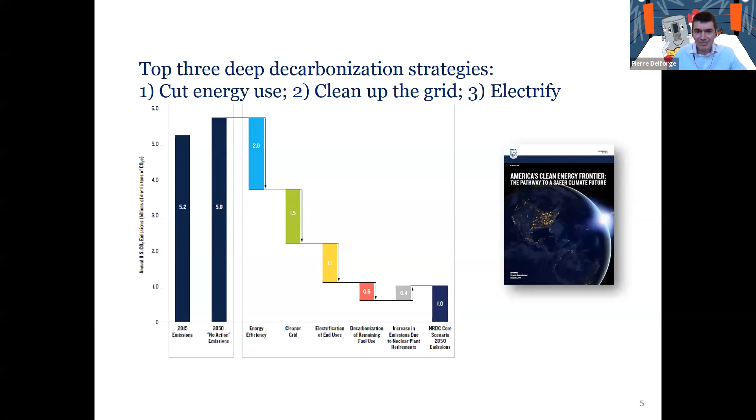So the building sector is responsible for approximately 2 billion tons of CO2 emissions in the US annually. That's out of 6 billion tons, so it's roughly about a third, and that's just from an operating perspective, not even including the embedded energy to build buildings. But just the operating energy use is about 2 billion tons.

Half of that is from thermal energy use, which is basically heating and cooling, water heating, cooking, drying, fireplaces, everything that basically generates heat or cooling. And decarbonizing that, so transitioning from the use of fossil fuel in this sector to high efficiency electric, can cut this energy use down by 1 billion tons, as long as we power it by clean, renewable electricity. So that's a huge number, and it's just the US. It's more when we expand it globally.

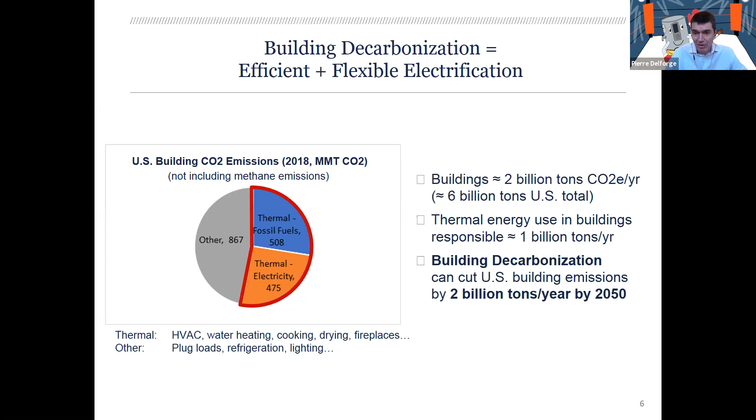And this is the opportunity that we have today of moving away from the use of fossil fuels in buildings to clean electricity powered by high efficiency electric heat pump technology. And I'm going to talk more about this in a minute. And so far, I've talked mostly about carbon, but it's not just about CO2. It's also including methane emissions, CH4.

So the challenge with fossil fuels and with gas in particular is that a significant amount of it doesn't get burned. It escapes from either the well or the processing plant, the distribution pipelines, or even in our buildings, behind the meter from our appliances and pipe within the buildings. And it doesn't take a lot of this methane to leak to have a very significant impact on the climate.

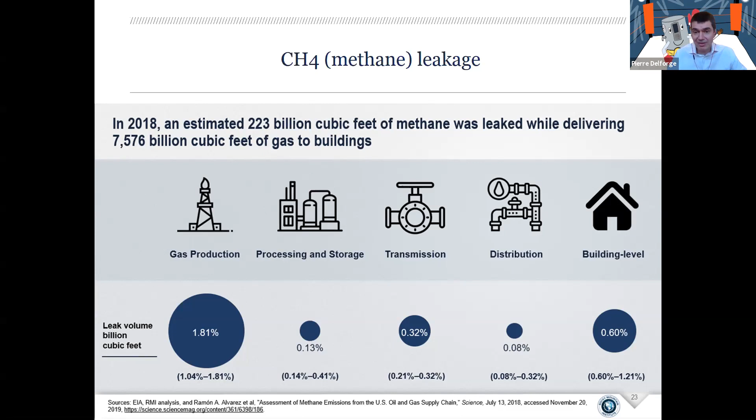So next, please. The best science that we have today is around 2.3% of methane upstream of the meter, so that's from the well to the meter, and about 0.5% behind the meter. Actually, newer science is coming out showing there's even more than that. So it's about 2.8% and probably more than that is leaking out of total gas use. And methane has a global warming potential much higher than CO2, about 86 times over 20 years. So it doesn't take a lot of methane leakage to have significant climate impacts.

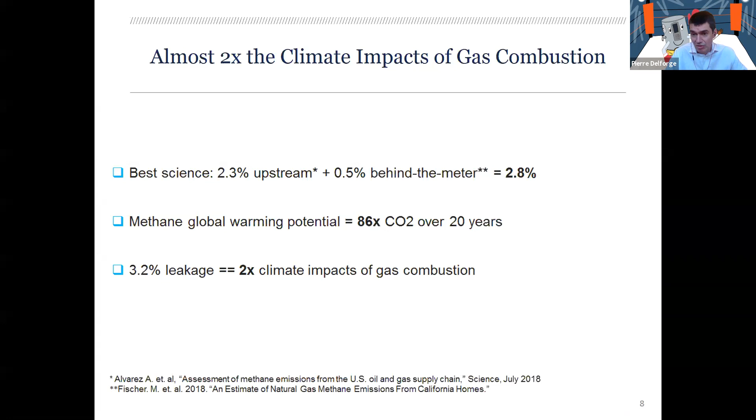And actually 3.2% of leakage is approximately twice the climate impacts of burning gas. So just looking at methane, we're almost doubling the impacts of gas use from combustion. So this is a very significant impact. And obviously, one of the best ways to avoid that is to reduce and eventually eliminate the use of gas in the building as well as the economy.

This technology isn't new. It's been around for some time, mostly in the form of air conditioning and refrigeration. What's more recent is that in the last decade or two, it's been used more commonly for heating and water heating applications. And it's become very efficient, very reliable, to the point that it's becoming the primary pathway to decarbonize our buildings today. Just heating and water heating is approximately 2/3 of energy use in the residential sector, and these are energy uses that tend to be powered by fossil fuels today.

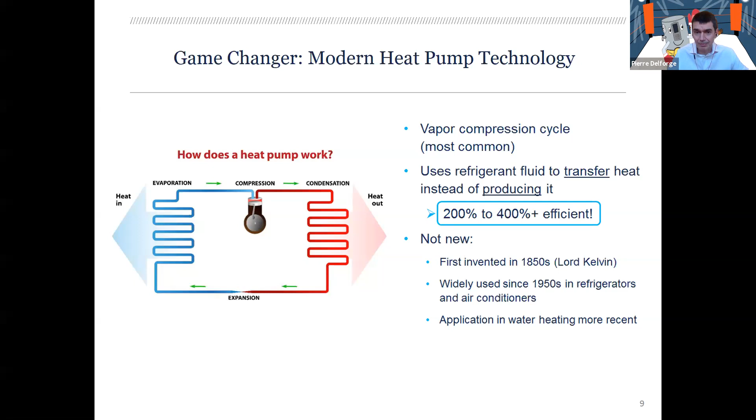So, we can put solar panels on our building, we can decarbonize our grid, but if we continue to burn fossil fuels to heat our buildings and hot water, we're missing a very significant opportunity. And heat pump technology is the opportunity to move these end uses to clean energy. Next, please. So how much reduction can heat pump technology provide? This example is for a heat pump water heater compared to conventional water heaters.

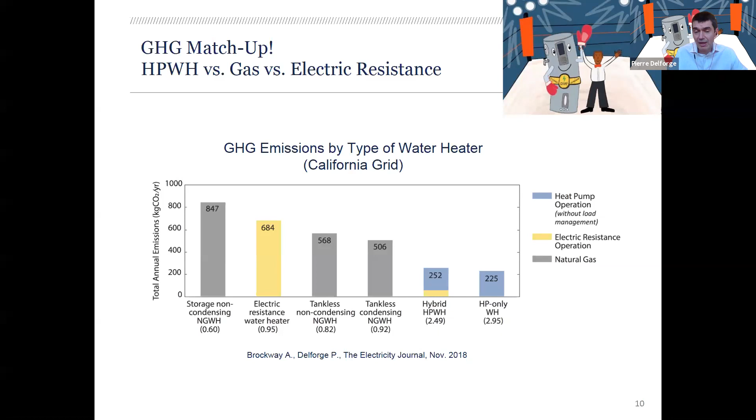As California's grid gets decarbonized, we have a goal of 100% renewable energy by 2045. The emissions from heat pump water heating will get down to zero, which is not the case with gas. So this is to highlight the very significant, the transformative potential of using heat pump technology in buildings compared to conventional technologies. Next, please.

So far, I've talked a lot about the climate benefits of heat pumps and electrification with heat pump technology. But even if we weren't doing it for the climate, we'd have a very good case for doing it just for health reasons. It turns out that burning gas in our buildings for heating, hot water, and cooking is responsible for 7 times as much air pollution as all the power plants in California. And that's because we don't have modern pollution controls on our gas cook stoves and furnaces, whereas power plants have been required by law to have pollution controls which reduce their emissions.

But today the majority of the NO2, so the NOx, nitrogen oxide emissions, is coming from homes and buildings. I mean, there's transportation as well, which is a major source, but a large part of it is coming from our buildings, and we don't even realize that. And one recent UCLA study on air quality found that indoor combustion of gas, particularly from cooking, generates emission levels which often exceed the legal limits that are set for outdoors. Actually, that's on the next slide, I believe.

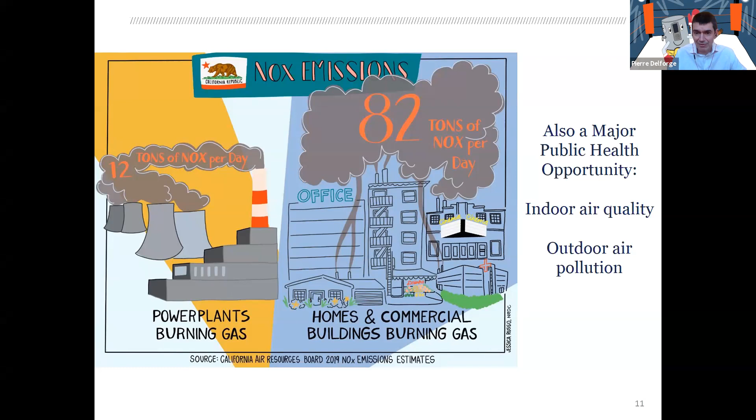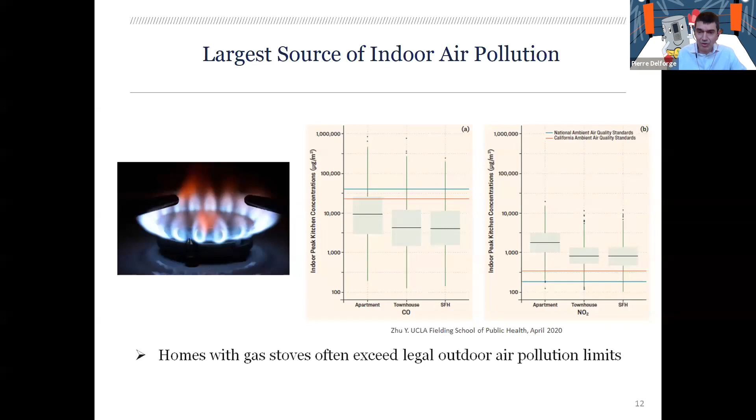And the good news, and next slide, please, is that we don't have to compromise with inferior technology. We actually have superior technology to replace our gas stoves, which is called induction technology. It's cleaner, it's safer, because the surface doesn't get hot. There's not as much risk of burns. It's faster, it's more efficient than gas and even conventional electric stoves. And don't just take it from me, but next slide, please.

The one sector that's still more challenging, where a smaller percentage is either not cost effective or slightly cost effective, is the retrofit of low-rise multifamily buildings. And we're pretty close to cost effectiveness. And as prices come down with market development, we expect that it's going to become cost effective very soon.

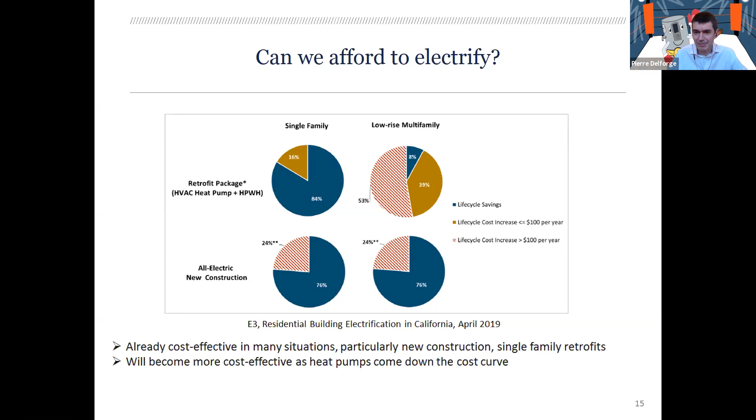Next, please. The other important factor to consider is that when we talk about cost effectiveness, we have to consider not just today's prices, but the prices as they're going to be over the life of the building and the life of the appliances in the building. And there is a trend happening in the utility sector that is really important because it's going to fundamentally reshape the economics of energy use.

The trend is that we're using less and less gas because of climate change reducing heating loads, because of energy efficiency policies, and just because more and more customers are choosing to use electricity instead of gas. So there's declining energy use on the gas side, and at the same time you have increasing cost of gas infrastructure because of pipeline safety regulations, because of trying to mitigate leakage of methane from pipes.

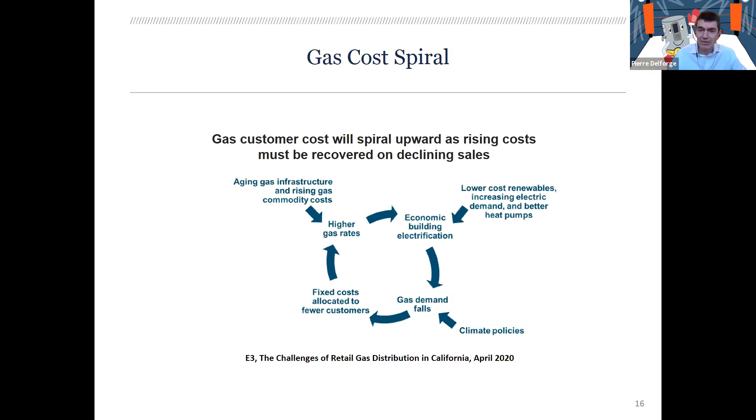So this dynamic of having increasing infrastructure costs that need to be recovered on declining sales means that you have a cost spiral that for every unit of gas has to recover more and more infrastructure cost. So next slide, please. So another study by E3 recently found that we anticipate the cost of retail gas to go up exponentially over the next 20 to 30 years.

Slowly initially, it's not going to happen tomorrow, but over the life of the buildings that we are building today and the appliances that we are choosing to put in our buildings today, we are going to face significantly higher gas prices, and it's going to end up with much higher gas bills than if you choose to build all electric today. So this is something which is really important to consider. Let's not just look at today or yesterday's prices, but let's look at where we're headed and make sure that we plan for the economics of our buildings accordingly.

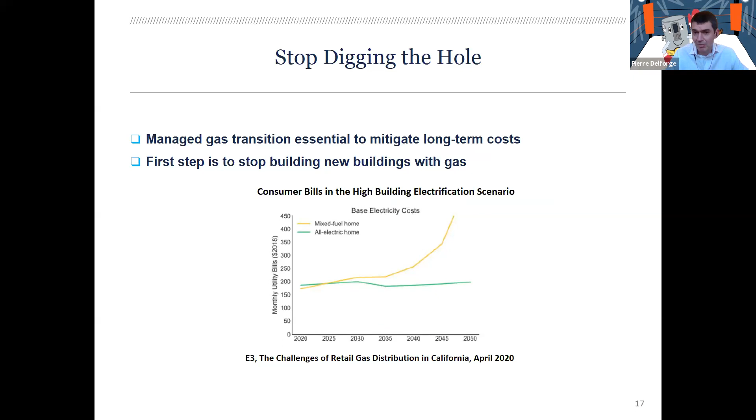And my last slide is really about one alternative that we've been hearing a lot, because the gas industry has been trying hard to make people believe that we don't actually have to change anything. If we just put a little bit of renewable gas in the pipeline, just 20%, that's going to be equivalent to electrifying everything. And unfortunately, it's not as simple, and this is actually a fairly gross misrepresentation of some studies

that have basically been showing that if you were to use all available renewable gas in the United States and use it all in the building sector, not just in industry and transportation and power generation, but all in the building sector, you might be able to have the same impact as electrification. But obviously, it's not just about California, it's not just about the building sector. The precious little renewable gas that exists needs to be used in harder to electrify sectors like industry, transportation, and seasonal storage, not in buildings.

So the real truth is that we just don't have enough of this precious renewable gas. It is super expensive. It's not affordable enough. And the other reality is that renewable gas still impacts the climate in the form of methane leaks. It's also methane. So it's also not entirely climate friendly.

So I think the takeaway from this is, we do need some renewable gas to get to our zero carbon goals economy-wide, but the building sector is not the answer, it's not the place to use it, and it certainly shouldn't be used as a smokescreen to delay electrification in buildings. Otherwise, we're going to lock up a lot of carbon use in our buildings, and we won't be able to get to our deep decarbonization goals.

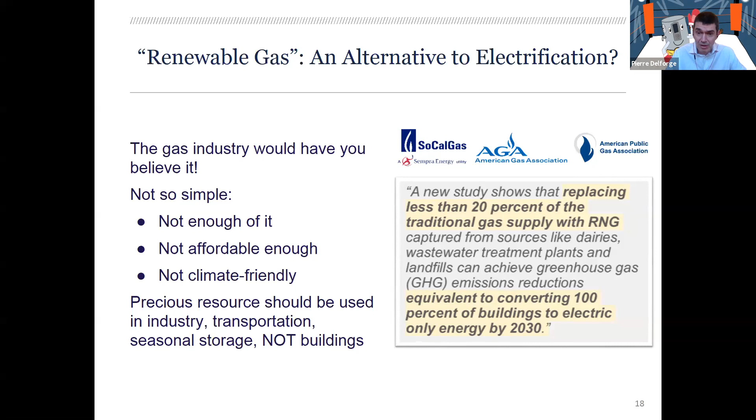So with this, I think that's my last slide. I'm going to turn it over to Amy, and I look forward to the discussion. Thank you.

Great, thanks, Pierre. So point of clarification, I am Amy Rider, but I'm actually here representing the Building Decarbonization Coalition. And so, although I also work for Archimede Consulting, I just want to be clear about representation today, because for the Building Decarbonization Coalition, I am acting as their REACH code coordinator, which is why you get to talk to me about process. So that's going to be what I'm reviewing today. So if you'll go ahead and go to the next slide.

And as Pierre eloquently said, I have an overly simplified version of this to show that because gas inherently has a variety of problems that we laid out there, but specifically just looking at the emissions profile, really the solution here to get to decarbonization of buildings is to eliminate the gas in those buildings themselves. And so that's really what this is showing over time, is as the electric grid cleans up, we'll have the opportunity to then also have cleaner buildings at the end of the day if we're building all electric now. So that's really the intent here as we continue to move forward.

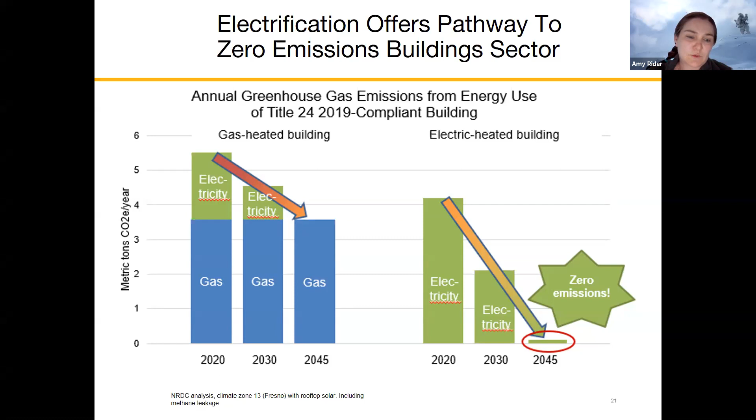So decarbonization being the goal of our organization, it really comes down to electrifying buildings with efficient equipment that has flexibility for demand control and to enable an even cleaner grid, I guess I should say. So to allow for a 100% renewable electric grid does require some level of flexibility, demand, and storage capabilities. And so all of that is important for us to ultimately get to a fully decarbonized building stock.

So today really is not entirely focused on the building code, but I think it's important to just touch on it briefly, because when we talk about REACH codes, generally folks think that we're talking about the energy code specifically, and I'll explain why there are some differences in how cities are approaching this. But the building code at large is really important, and the energy code itself is a very common compliance pathway for setting new standards at city scale for buildings to electrify under new construction codes.

And so as architects, and although I see several city staff on the list here of participants as well, you're probably fairly familiar with the energy code, but the new code did go into effect just January of this year, which although that feels like a lifetime ago at this point, is fairly recent. And it does not fully encourage electrification. In fact, it has some limitations around building all electric homes that we are all working through. And this is part of why REACH codes at the city and county level have become so popular, moving the needle towards requiring or at least promoting all electric construction.

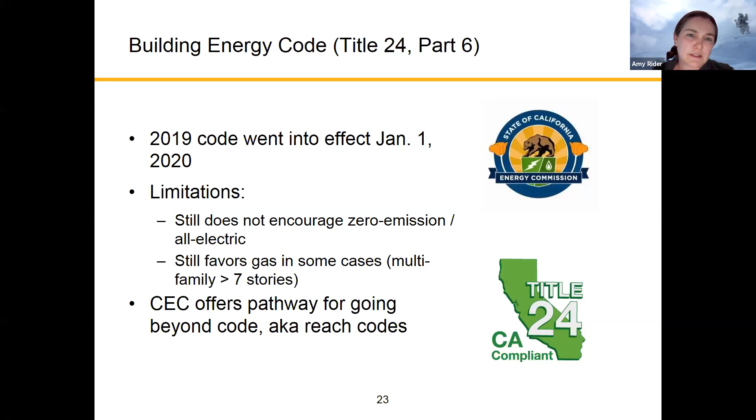But there's definitely precedent for the energy code in this way, going above and beyond, and really pushing for electrification specifically, so we can start to get at the emissions limits within buildings themselves. So three important things for everyone to recognize, though, as REACH codes come forward, and this is often a point of contention for the conversation that Matt will be leading later when we're talking with stakeholders, but what really is required when it comes to REACH codes?

And first and foremost, the state requires that cost effectiveness is part of the equation. And so that's a really important thing to know up front, is that there have been studies actually conducted for the entire state looking at electrification compared to standard construction, which we call mixed fuel typically in my world of REACH codes, and that the solutions that we're talking about today are found to be cost effective across the state, regardless of your climate zone and in building types of all kinds. So that's certainly an important thing to keep in mind.

One thing, however, that's a little bit more nerdy is about preemption, because the federal government actually gets to say which appliances can be installed in terms of their legal minimum efficiency for simplifying manufacturing processes. There are some limits on how prescribed specific appliances can be. So that also is addressed though by the cost effectiveness study.

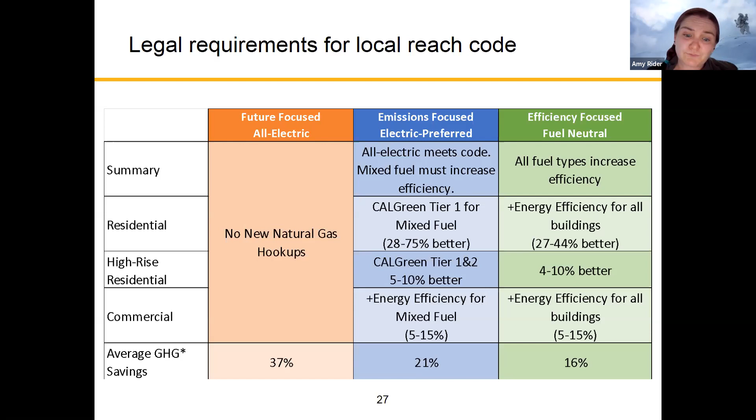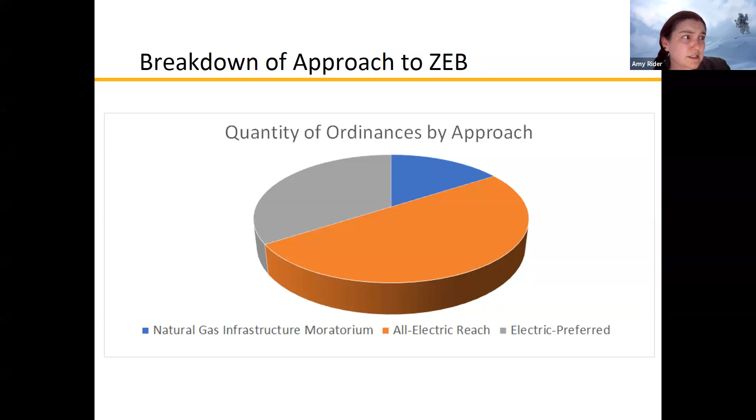One thing I will note is that the blue slice here in particular is not through the energy code. And so it has slightly different requirements, but it also has a little bit more flexibility about how it's implemented. But the process generally is the same, where talking with you all and getting stakeholders on board is part of that process. So from the external side of architects and designers, you won't see much of a difference if they're going for a moratorium at the city level, but for city staff, there are some pretty significant differences that should be considered for those approaches.

Many others have said that electric water heating and electric space heating are required, but have left fireplaces and stoves out of the equation until we can build consumer demand for those things as well. So in those cities, they chose to go what might be perceived as a slightly easier route, but I think is still a very viable solution for getting those big emission generating devices out of the homes.

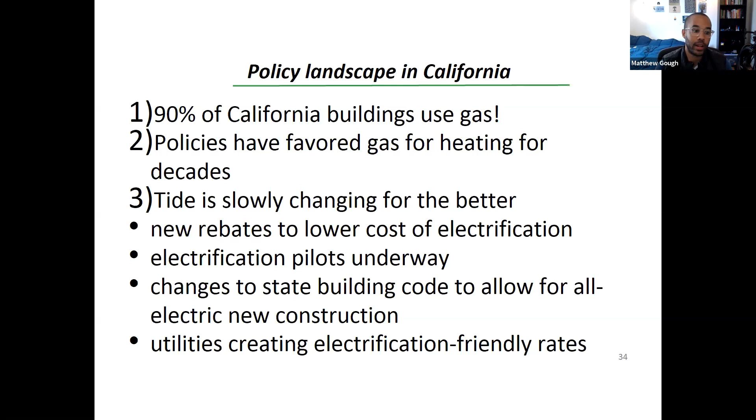So then just to zoom in a little bit further, what specifically are we advocating for? So new rebates for technologies like heat pump space heaters and water heaters and induction stoves, inclusive financing so that more folks are able to get this technology, both at the point of construction and for individuals who are looking at making individual changes, and then rate reform from the utilities to make electrification even more competitive than it already is. Another opportunity in California is to stop expanding the gas system.

So we have really ambitious climate goals. We're trying to get to carbon neutrality by 2045. And so changes to the city and state building codes for new construction to be all electric help us get there. We also know that California is in a housing crisis right now, and electrification done smart can help to alleviate that pressure. So we need to be sure that we're advocating for no displacement and for rent protection for tenants. And we need to make sure that we're centering low-income renters so that electrification is distributed evenly across the state.

A managed transition is another important policy platform that we're thinking about. So as we move towards a carbon-free future, we need to think about those gas workers and those people who are currently in the gas system and what their future looks like. So how do we prioritize and protect workers and Californians of all stripes? So next slide.

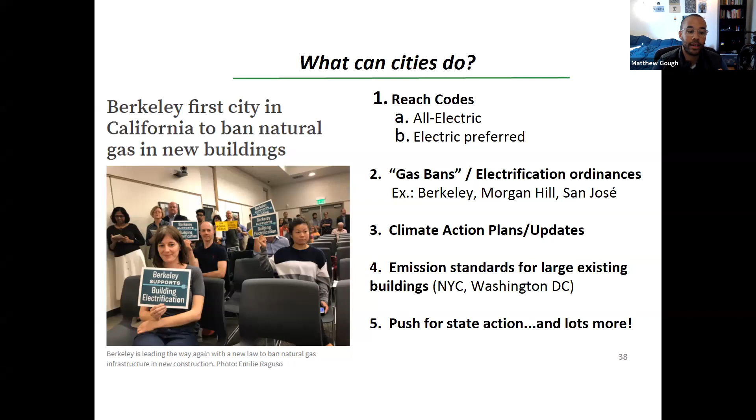So how folks on this call can make an impact in their community. So we need you to get involved. So how can you actually do that? If you want to get really deep and in the weeds, cities are hungry for folks with your technical expertise to help guide them on this policy, to understand what is currently feasible and what they should be including in their policy. So lending technical support to cities when they need it is a useful thing that people on this call can do.

Making public comment at city councils or a virtual public comment, now that we are all online thanks to COVID-19, is another great way to educate elected officials on what this issue is and how it can work, and how in your professional experience it's viable and makes sense for your community. Having folks on this call also engage in media work is valuable. So writing letters to the editor for your local paper can help to raise the visibility of the issue.

Writing op-eds is another great way to educate folks who are reading the newspaper or listening to the radio about the benefits of electrification. Talking directly to reporters to answer their questions from a technical perspective is quite valuable. And then just doing grassroots advocacy. So if you have time to do organizing in your community, that can go a long way. So sending petitions and letters to council members is valuable. Recruiting your friends who might be in the builder and developer industry to also get involved can make an impact. And then organizing public events.

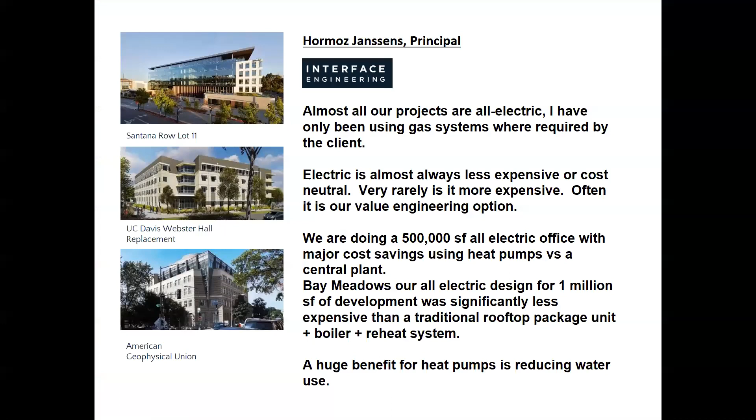Next slide. So here's what some of those folks told me. Hormoz at Interface Engineering, they do lots of commercial and higher ed work. Hormoz said almost all our projects are all electric. I only use gas when the client makes me. Electric is almost always less expensive or cost neutral. Next slide.

MITHUN is doing a number of large multifamily housing projects in the Bay Area. And Malcolm Harris, the principal there, said, we have a large number of these projects, and I'm a huge, huge fan of this change to all electric multifamily housing. It's better in every way, a great simplification of the system. It's less expensive, higher performance, less maintenance, and more sustainable. Next slide.

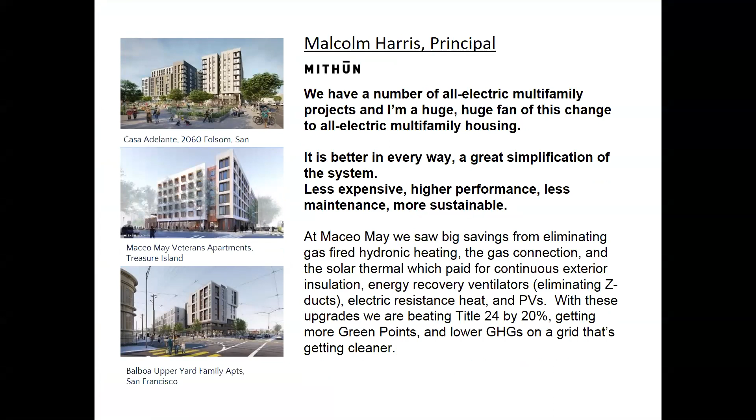One of the things I've done is people keep saying, oh, well, can you do this project or can you do that project? So I've called on my colleagues, and I'm calling on all of you, send me your all-electric projects. And I put them together in a slide deck that looks kind of like this. There's probably up to 100 projects now of all different project types. And then somebody says, oh, I know EHDD or I know Integral Group. I can call them up and ask them how they did that or what they think. And it's been very effective.

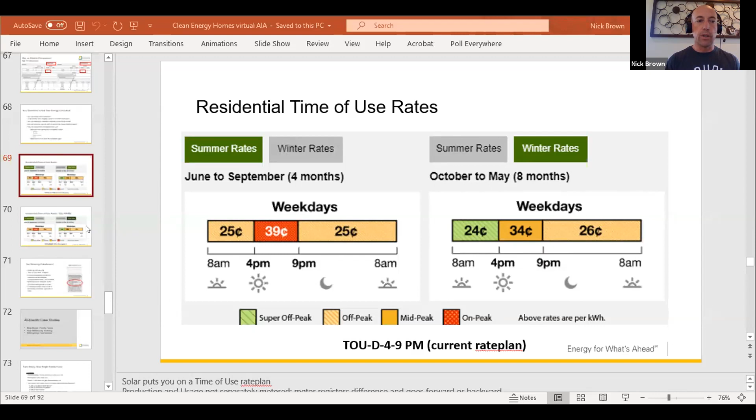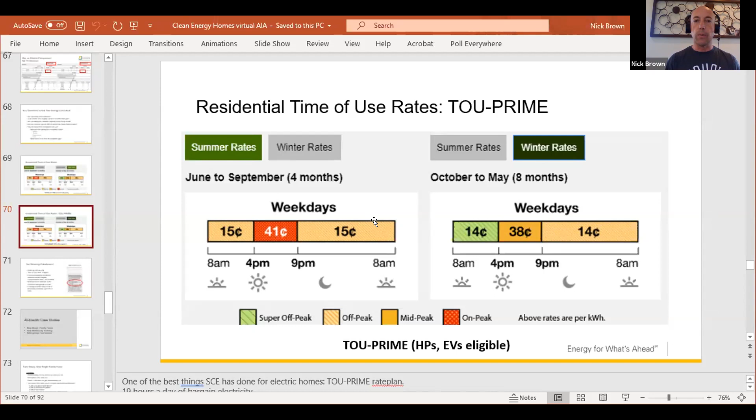This is SCE's normal time of use rate down here in Southern California. You can see even off peak, you're paying 25 cents per kilowatt hour in summer and winter. If you go now to the prime rate plan, you've got slightly higher rates in peak period, but fantastic rates, 15 cents, 14 cents for most of the day. Those are fantastic for running a heat pump in winter heating season, as well as in summer cooling season. And you can program a heat pump water heater to coast through that 4 to 9 p.m. period in many cases. So I wanted to mention that.

And when I run an energy model using a mixed fuel house on the one hand and an all electric house on the other with that SCE prime rate, the savings can be $200 a year in utility costs.